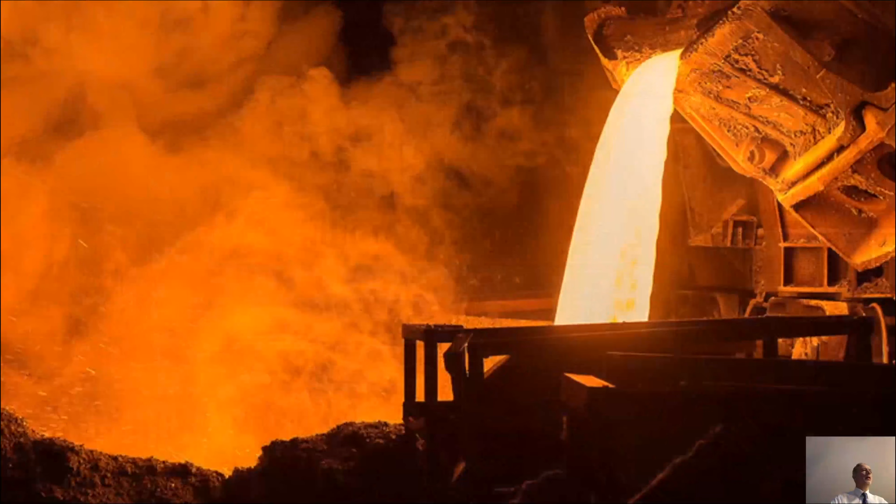This enormous success of metallurgical products comes, of course, with a huge burden. This is, for instance, the fact that the production of metals consumes about 8% of the global energy per year. And what is even more staggering is that this metallurgical production also consumes about 40% of all industrial greenhouse gas emissions per year. So this is by far the biggest single contribution.

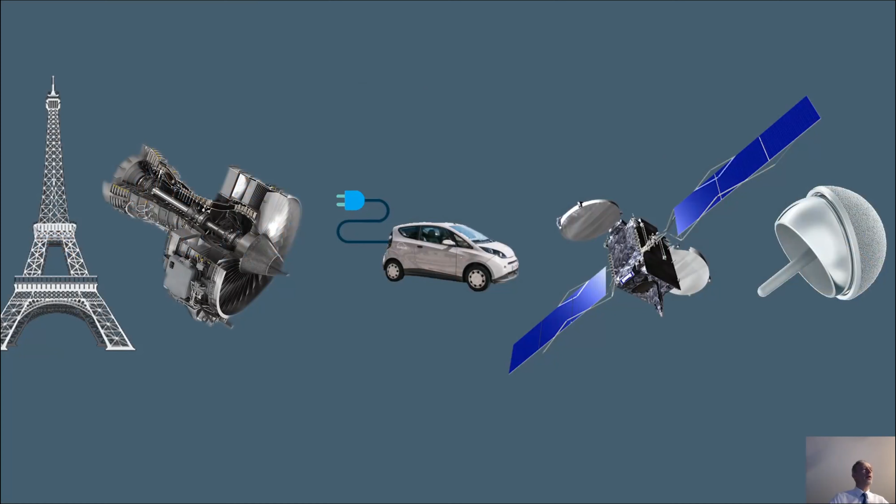On the other hand, we of course have all the wonderful and important products we lean on, and we should also recall that the global market for materials is about 3,000 billion euros per year, which is a gigantic market which depends on metallurgical products. And the question now is whether this market can be turned into a circular, into a sustainable market.

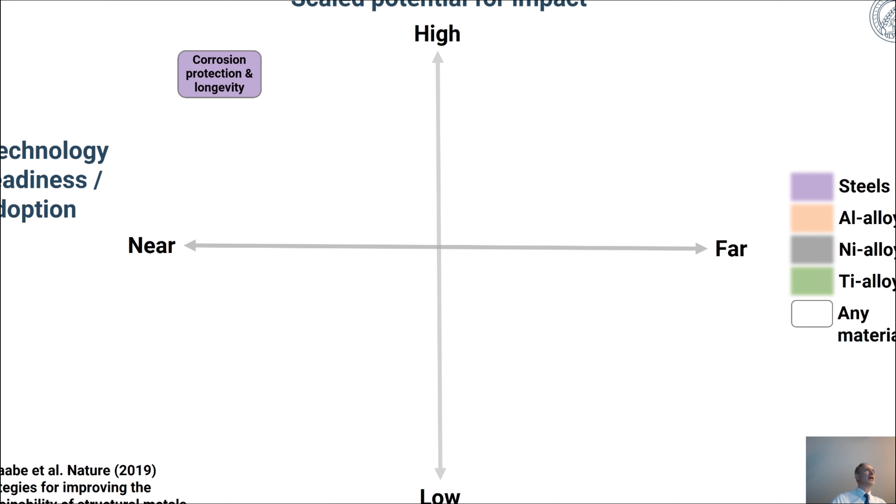And the next step is, of course, what in this setting the contributions from basic material science and metallurgical research could be. And this is essentially the context of this presentation. There are, of course, many aspects that we can tackle by basic and applied research. This is a diagram which shows the technology readiness against the scaled potential for impact. So it shows us how close certain techniques are to applications and how big their impact might be.

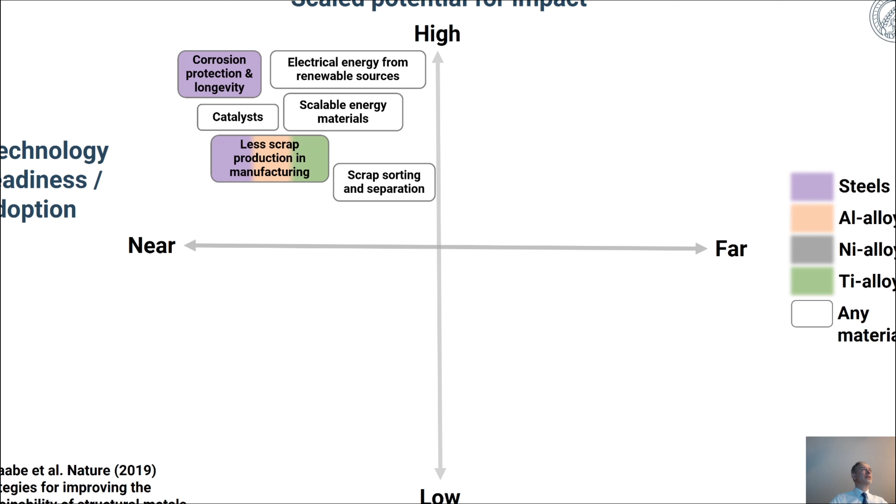The biggest impact, of course, with the highest readiness is corrosion protection and improving materials longevity. A likewise very high impact comes from using more electrical energy resources when making metallurgical products, provided they come from renewable energy sources and not from carbon-based energy supply. There are, of course, many other aspects, such as producing less scrap or better byproduct management, producing and wasting less of the often poisonous byproducts from metallurgical production.

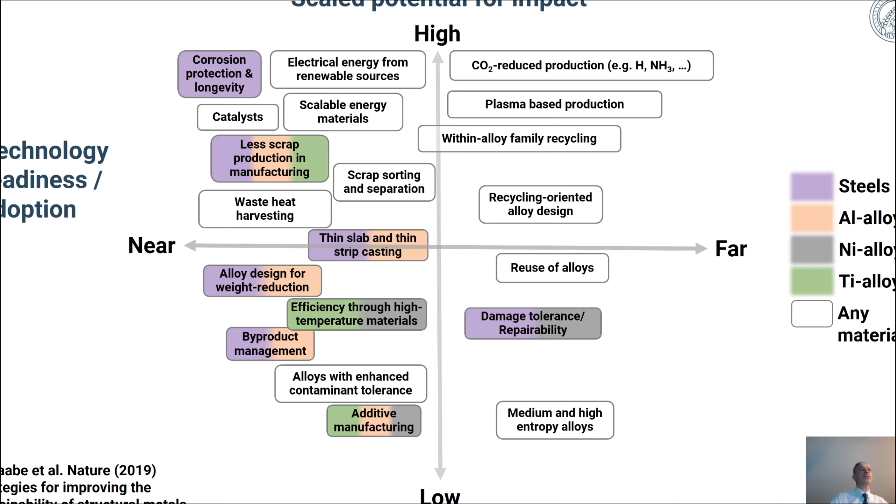But when it comes to aspects that have a very high impact and at the same time are still quite far away from application, you see, we have to deal with the CO2 reduced production of metallurgical products. And this is also the deeper context of this presentation, focusing here particularly on iron. Why do we focus on iron?

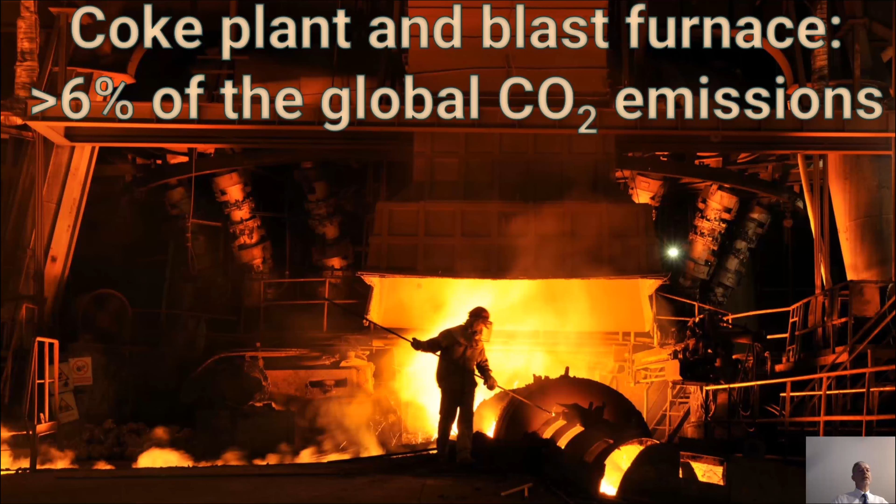Because when you take a look at coke plants and the classical blast furnace production route, then you can appreciate that about 6% of the global CO2 emissions are created by these two production steps. That means the impact of these specific technologies is really gigantic, and that's why we draw our attention to them.

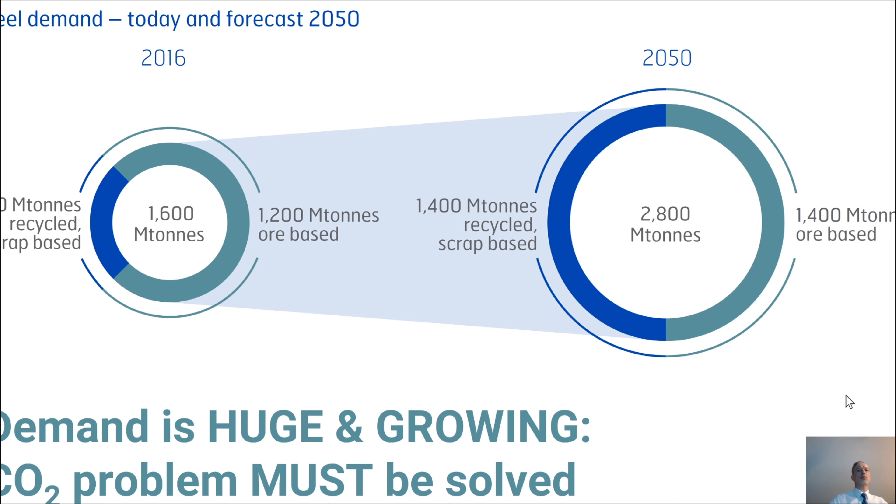And make no mistake, the growth of the steel market is still gigantic. You don't see it everywhere, but believe me, steel is everywhere around you, and still the growth rates are staggering. We currently produce about this year 1.6 billion tons of steels, and this is forecast to grow towards the year 2050 to the gigantic amount of 2.8 billion tons of steels. So this is simply gigantic and is creating a gigantic wave of CO2 problems related to global warming. That means it's a very urgent and pressing burden to deal with that

And the classical route is of course a liquid phase route, where the reduction takes place in the solid state, but then you tap the liquid iron in its near eutectic state, and that is the so-called blast furnace route. There are of course also viable alternatives where you directly use electrical energy, such as in iron electrolysis, which is also a very promising avenue.

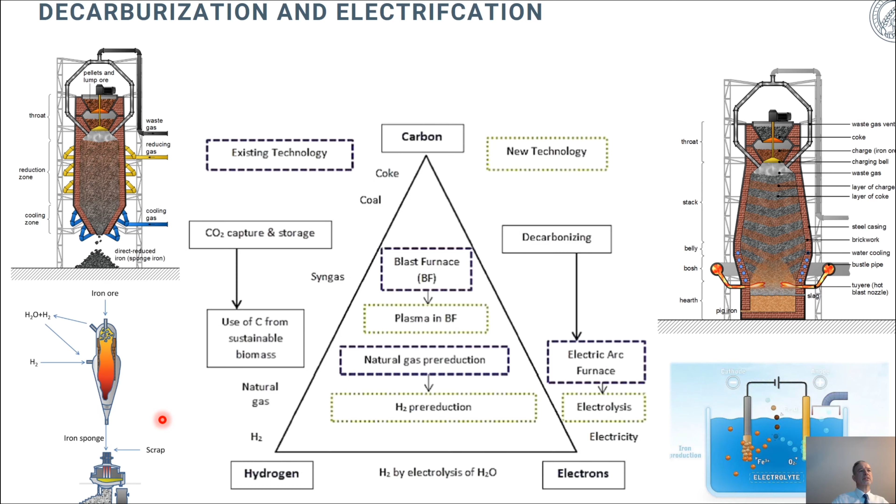In this presentation and investigation here, we deal particularly with the so-called direct reduction technique, which is based on the direct and solid state reduction of iron ores by using hydrogen, such as shown here. And the iron sponge that you produce thereby would then later enter, for instance, into an electric arc furnace.

And we now take a little journey through the microstructure of these pellets, which are pelletized products of the original iron ores. And we start with hematite, so Fe2O3 as a starting product. And we conduct this reduction analysis at 700 degrees centigrade, and we use pure hydrogen for this.

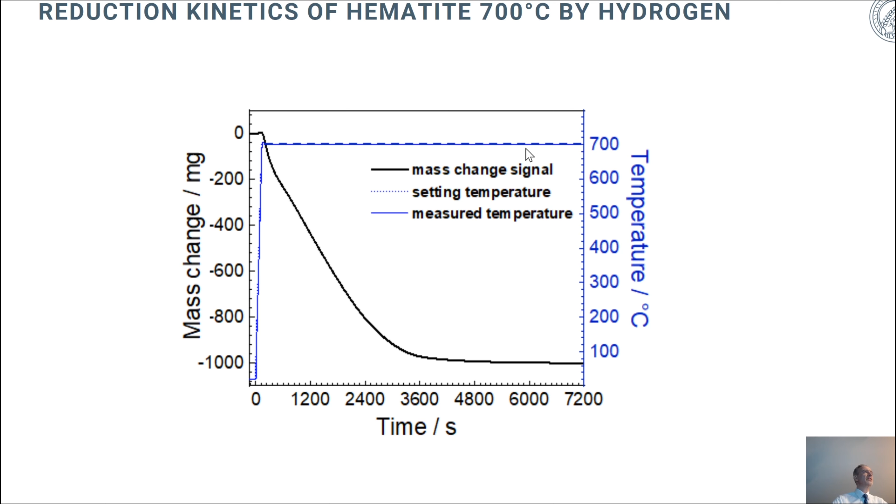This diagram shows the mass change as a function of time. And here you have the temperature range. That means we keep the temperature constant at 700 degrees centigrade and follow the mass loss as a function of time to track the reduction. When you look at the corresponding derivatives, then you can see that the reduction rate, which is plotted here on this axis, changes as a function of the reduction degree.

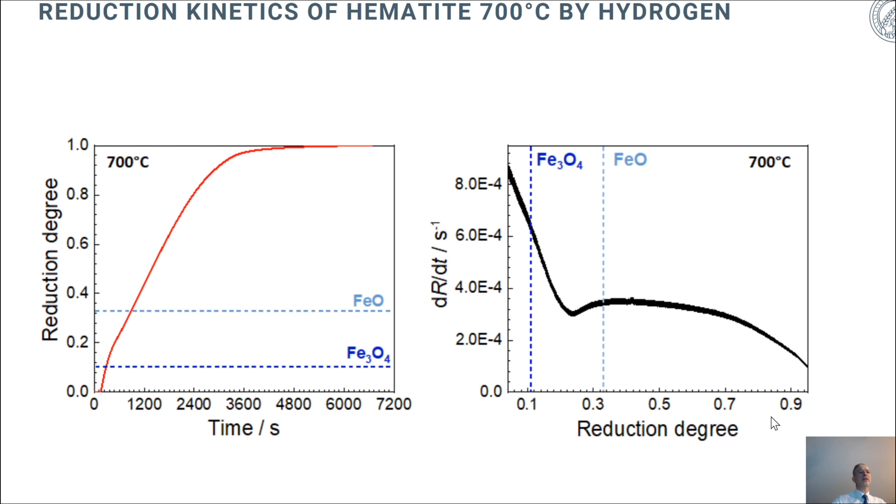This is a very important diagram because it shows you where the kinetics in the reduction is fast and where it is slow. And we see that particularly at the beginning, the reduction is very fast when you reduce the hematite into the next oxidized states, which is the spinel, namely the magnetite, Fe3O4. And the by far slowest and longest reduction takes place in the transition of this magnetite at 700 degrees centigrade into the wüstite, and further from the wüstite into the iron, of course. So the kinetic bottleneck is, so to say, the reduction of the wüstite, which makes this process really slow.

The theoretical picture behind this reaction is shown in this diagram. You have here the last stage of the overall reduction sequence, which is the wüstite, the FeO, such as shown here. And as you reduce in the beginning that material through a surface reaction between hydrogen and the oxygen, you form a layer of iron on top of the wüstite. And that means that due to the gradient in the chemical potential, the oxygen must leave the oxide and diffuse outbound towards the free surface or pore or surface of the pellet to react there with hydrogen to form water. And these are the different kinetic steps that have been considered and might act as individual bottleneck reactions for the overall kinetics. And it is a task to identify these bottleneck steps in the overall kinetics and find solutions to make them faster, to make this type of production route viable.

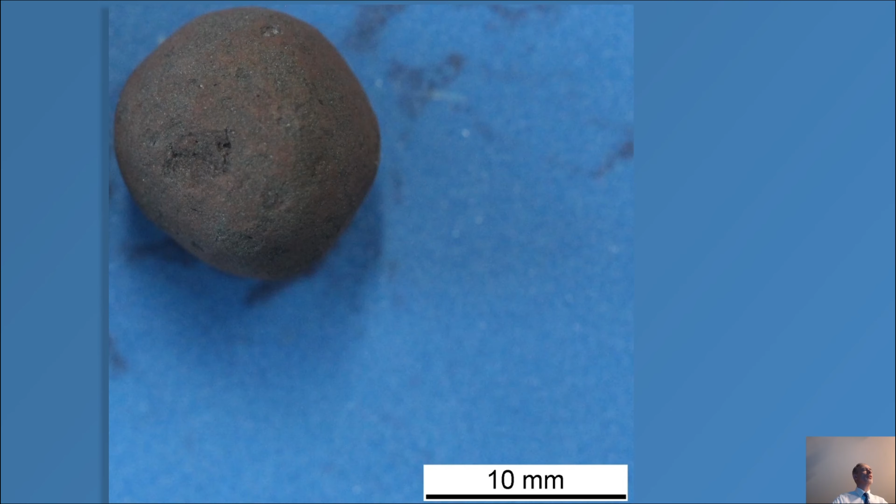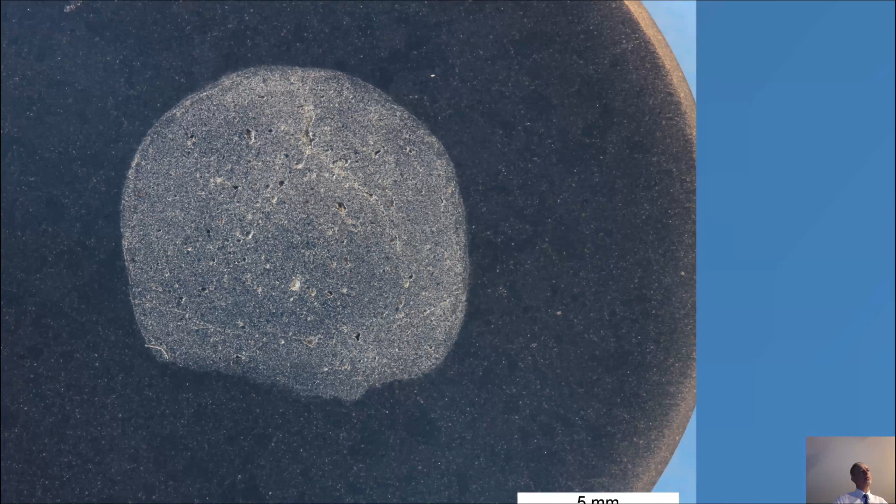Let us have a little fly through the pellet, the hematite pellet. Originally the pellet is hematite. So we cut it through and you see a modest porosity which is inherited from the processing step. That was originally designed for classical direct reduction processes, because this is a so-called direct reduction pellet. And you see that this material has a very complex microstructure consisting not only of multiple pores but also of multiple interfaces, grain boundaries, and internal free surfaces.

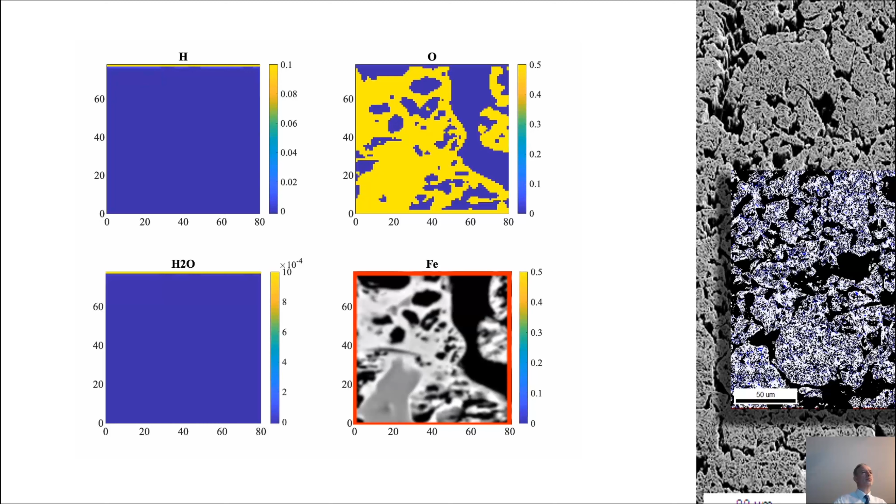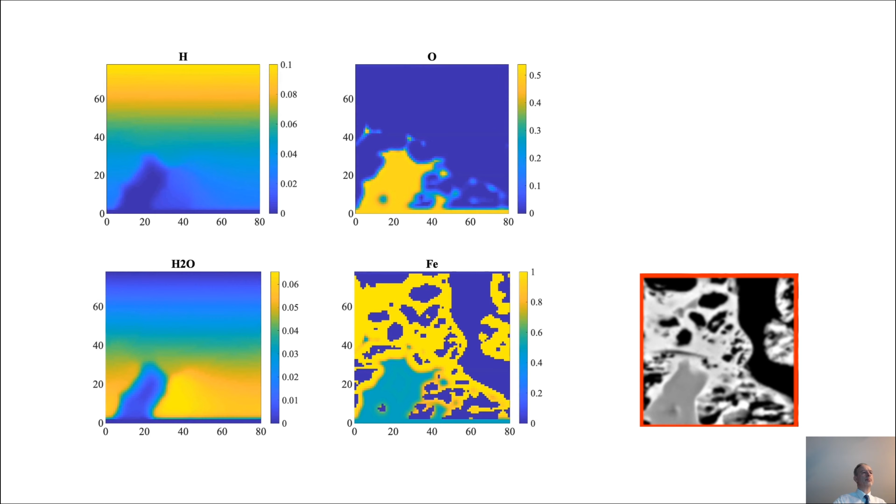When you look a little bit closer at a higher resolution after some reduction state, and we look at this later in much more detail, then you can indeed see after a certain reduction time a very complex internal structure with inherited porosity, but also with newly acquired porosity, which is due to the mass loss. Let us look a little bit closer at this. You can put this now into full field simulations, the details of which will be subject to a separate lecture. This will not be discussed in this lecture. And then you can, based on this real microstructure of the pellet, do corresponding simulations of how the reduction of the wüstite is progressing under such geometrical confinement conditions. So there's in principle a Ginzburg-Landau phase field simulation behind this.

So what is really interesting is to take a little look into the partially reduced pellet. And this partially reduced pellet is shown here in terms of an SE image. SE stands for secondary electrons in the scanning electron microscope. And you again see this inherited porosity from the preceding pellet manufacturing steps. And this map shows from the EBSD measurement the phase distribution and the so-called IQ, which is the image quality, which tells you how many defects you would find in each of these phases.

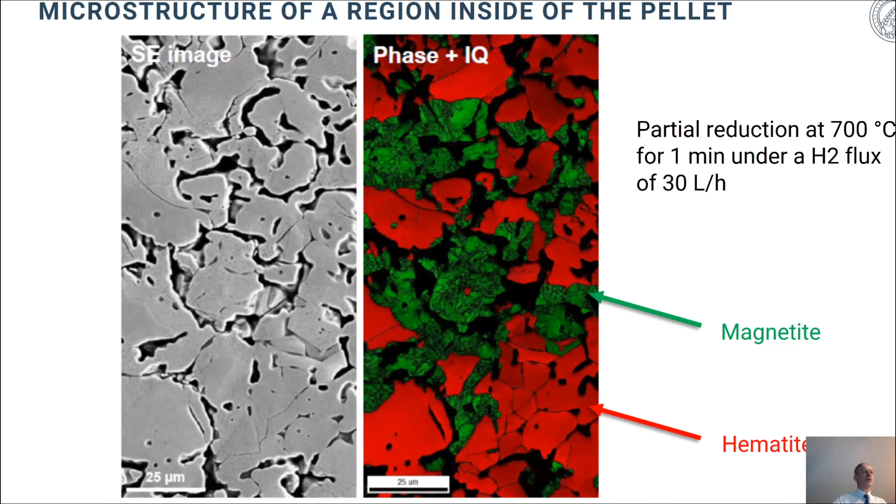And you see here specifically after 1 minute exposure to pure hydrogen at 700 degrees centigrade, 2 phases. One being the original hematite, so that is the original material from which the pellet was made. And this is the already reduced material into magnetite. So this is the first reduction step, which, as we saw in the beginning, is a very fast reduction step. But you can see really how these 2 phases are intermixed. So there's no global huge growth front that goes through the pellet from the outside to the center alone, but you have also inside each of these near surface or near center regions a very complex interplay of the geometry and the local reduction kinetics. Now let's look at this a little bit more in detail, because there are not only structural features, but there are also chemical features that you inherit.

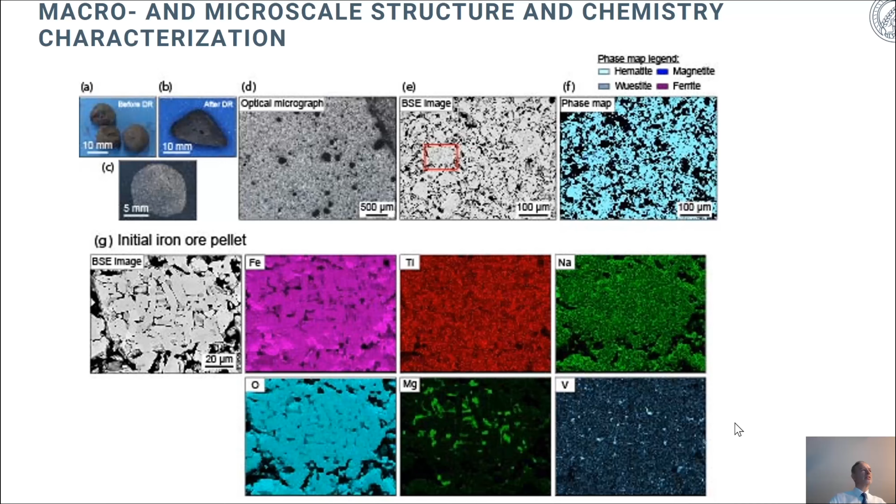Because depending on where you get these ores from, you also have chemical heterogeneity in the material and not only structural heterogeneity. This is shown here from a micrograph in a BSE image of the initial iron ore pellet, and you see in terms of the iron distribution that you also have other elements such as titanium, sodium, even vanadium, magnesium, and so on. So that means you will later see, when we go to a near atomic scale analysis, that these features also play a role in the reduction kinetics.

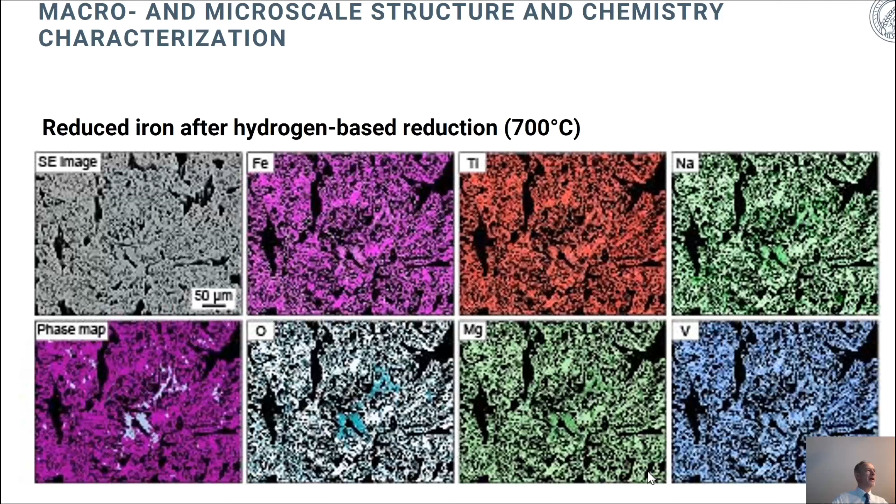Here you see again a pellet that has been reduced by pure hydrogen at 700 degrees centigrade. All the data are taken at 700 degrees centigrade. And then you see how some of these chemical features, of course, prevail over the reduction. We will later look at this, as I said, in more detail. The message of this picture is just to remind us that we inherit complex structural features and complex chemical features when we deal with the understanding of the role of microstructure and internal fracture and internal kinetics on the overall hydrogen-based reduction.

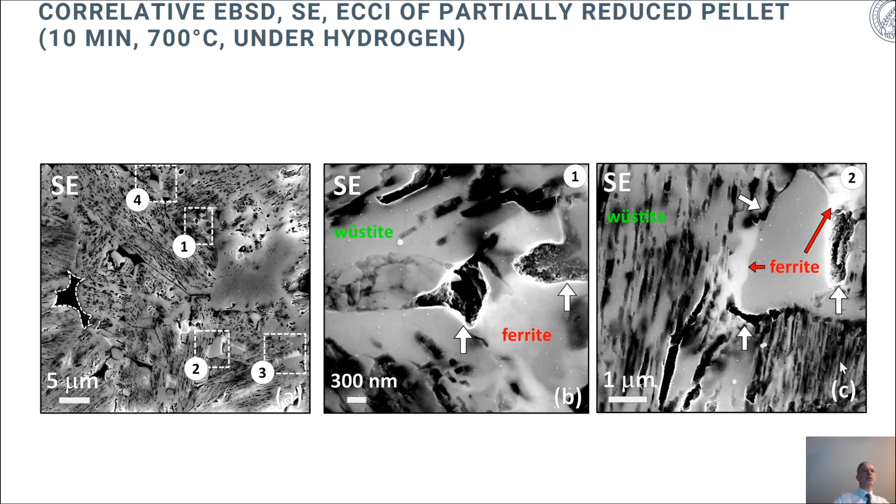What you also see, which is very interesting, is ferrite that is growing inside of the wüstite. This is a wüstite, this is a ferrite, and you see very complex interfaces here from the wüstite to the ferrite, and again substantial porosity building up between these two phases. And here you see even something like a delamination at the interface between the bright shining ferrite and the slightly darker wüstite, which is obvious because you have more than 40% weight loss between the wüstite and the ferrite.

This is shown here in a higher resolution, again at the interface between ferrite, which grows on top of the wüstite, and here is the wüstite. Again, the bright phase is the ferrite, and you see numerous types of pores and cracks building up everywhere around that growing ferrite. The other thing, and we will look into this in detail in a minute, is at the direct interfaces. When you go to the ECCI contrast, which stands for electron channeling contrast imaging, you also see certain dislocation and defect populations built up everywhere inside of the wüstite. That is what you see here.

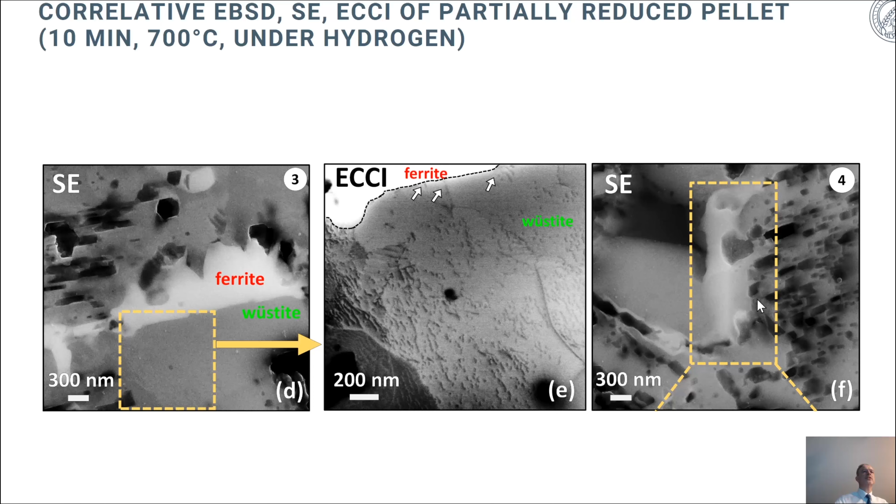That means we must, for interpreting the kinetics of the reduction, also consider the formation of internal defects, both inside of the wüstite and ferrite. The reason is again that the volume mismatch between the two is very high and leads to substantial stresses and also to fracture. This is also shown here again, where in the secondary electron image you see ferrite forming in the wüstite, and in the wüstite you see everywhere this very fine porosity which builds up. This is, by the way, also very important, because when hydrogen can diffuse to these open pores from the outside, then the outbound diffusing oxygen from the reaction interface can already recombine in these pores to form water, which is also a kinetically important aspect.

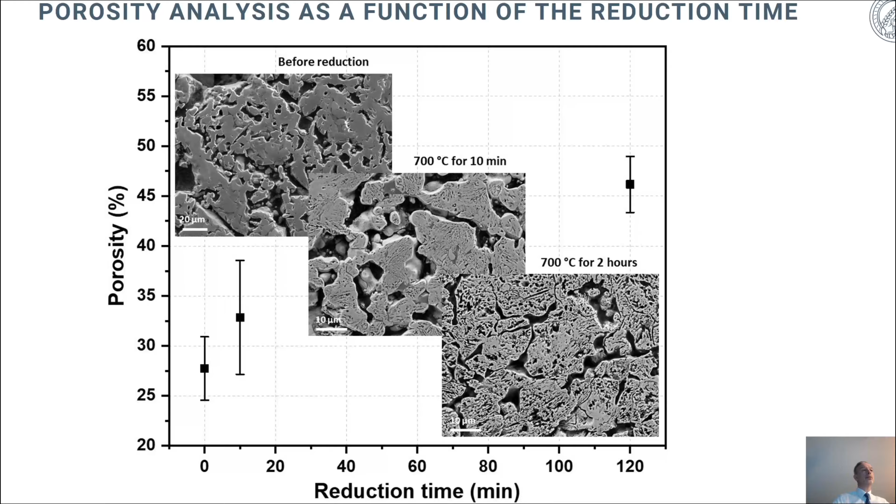Now, what is also interesting is to look at the development of the internal porosity as a function of the reduction time. This is shown here, and you have this inherited porosity that we have seen before in the pellet prior to the hydrogen-based reduction. And when you start reducing it, you see how the porosity, which is about 27% in the beginning, grows towards a value of more than 40%, which then shows the difference of the acquired versus the inherited porosity. That means about 20% of the porosity is created during the reduction. And some of this is due to fracture, others are due to diffusive porosity growth.

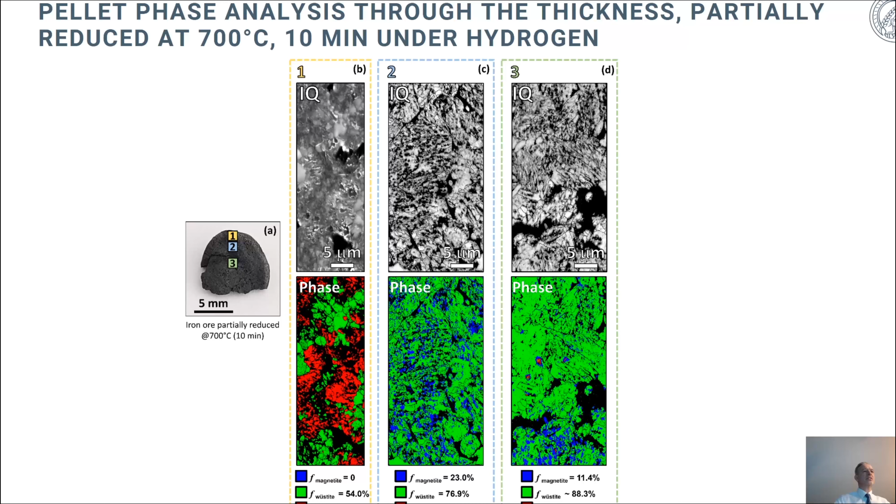What is also very interesting, if you do not only look at the very fine scale, but take one step back and look at the gradients of the reduction kinetics and the porosity through the thickness of the pellet. When we show that here in terms of a pellet which has been cut through and follow these three positions from the outside towards the center, then you can see how the reduction is much higher in those regions which are closer to the outside, and it's much more sluggish in those regions which are closer to the inside. So this can be explained in part by the oxygen obviously also having to take a long diffusive path outbound of the pellet, or at least towards the next available internal interfaces.

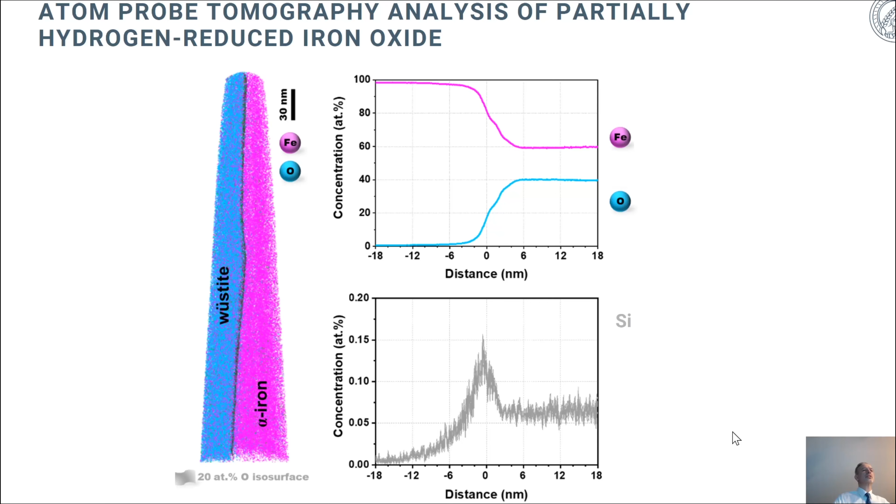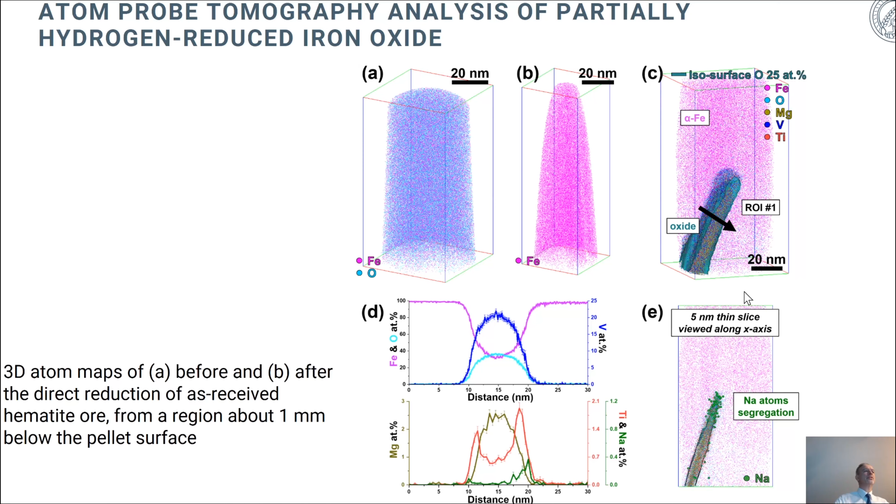Another point is that you also form other types of oxides. Here, for instance, we find more complex oxides based, for instance, on sodium or also on magnesium. And these, as you know, have very high enthalpies with the oxygen, which makes them harder to reduce by hydrogen, so that some of these oxides prevail as the reduction goes ahead. And here's another picture that shows similar features with not only magnesium-rich oxides, but also titanium-rich oxides, which remain in the pellets during the reduction and can make the process more sluggish.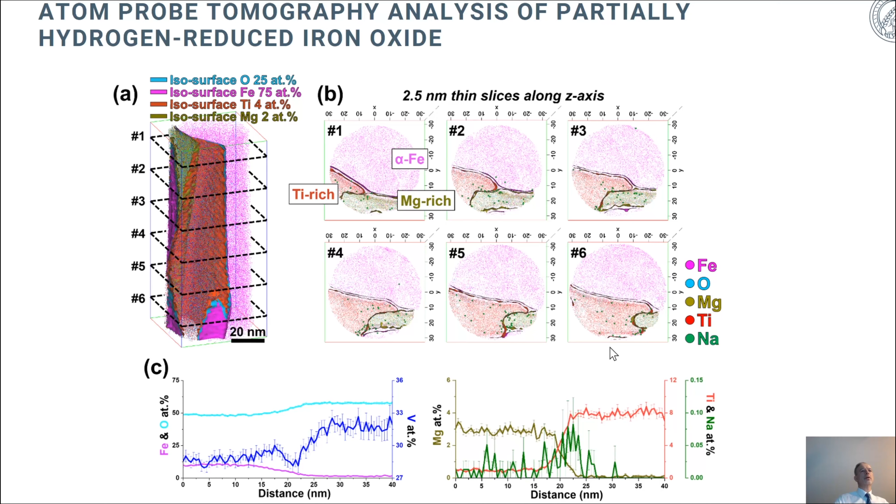So in future, it's also important to not just understand the microstructure, the evolution of fracture, internal damage, and porosity due to the mass loss from the wüstite towards the iron, but also how these impurities affect the rate of the reduction. Last but not least, we should also emphasize that you must understand how much hydrogen really remains inside of the material. Because when we have iron that is produced with too high a hydrogen content due to this type of reduction, you might later encounter the so-called hydrogen embrittlement in your materials, which you of course do not want.

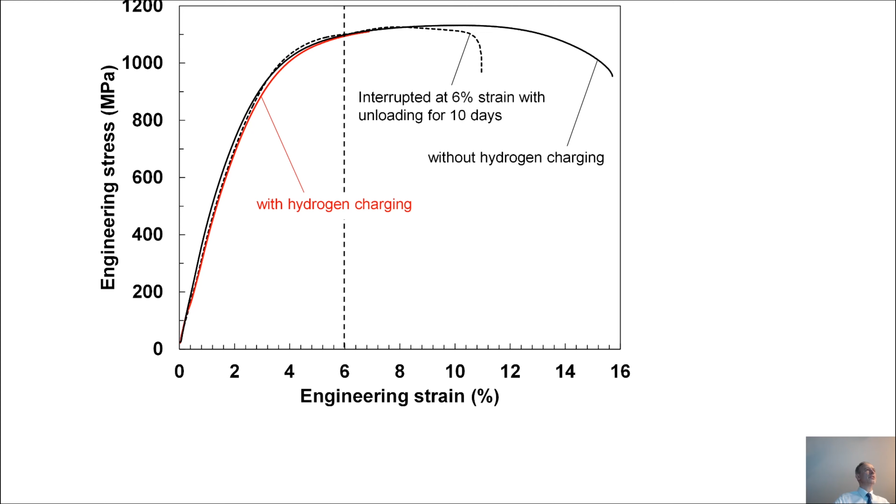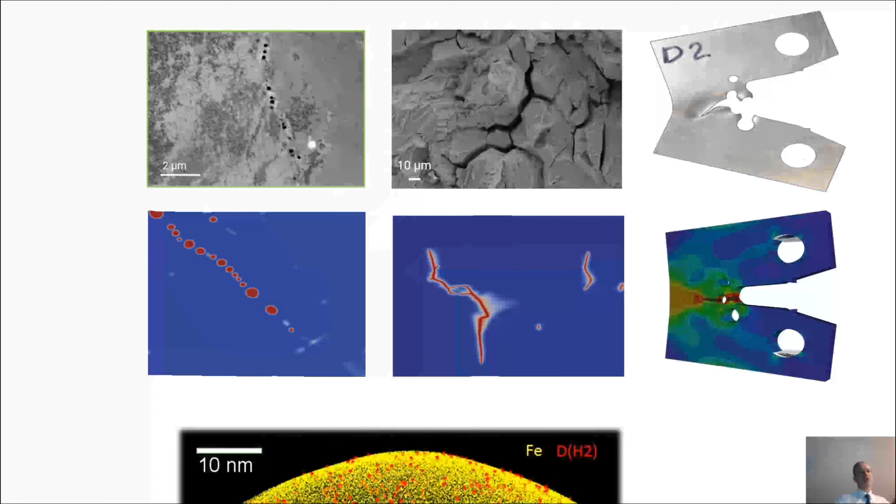This is shown in this type of curve. And these curves are often published in the literature, which simply show that when you expose a material to high hydrogen charging, then you get the so-called hydrogen embrittlement, which becomes visible in a reduced tensile ductility. And it is of course also the target to better understand pore formation due to hydrogen in the solid-state iron and decohesion, which both are mechanisms that contribute to the hydrogen-enhanced damage. And the task is here, like said before, that we also want to study these effects in the freshly produced iron due to hydrogen in the as-reduced state down to the atomic scale and with theoretical understanding. This is just a projection of what kind of research has to come here in the future.